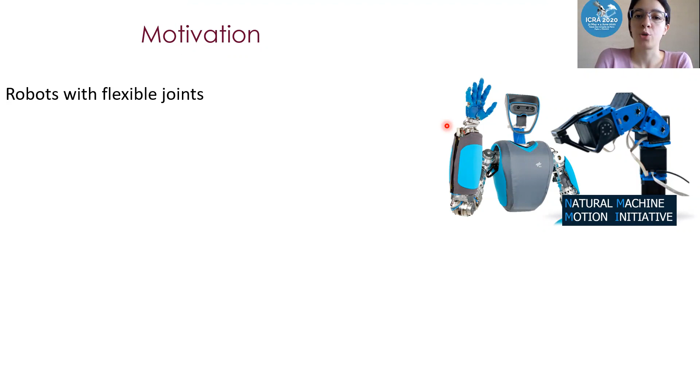So how can joints change their stiffness? Well, actually, they have variable stiffness actuators. And with the development of robots with flexible joints, also variable stiffness actuators have been developed. Nowadays, we have novel open source and cost-effective variable stiffness actuators that are emerging to the market.

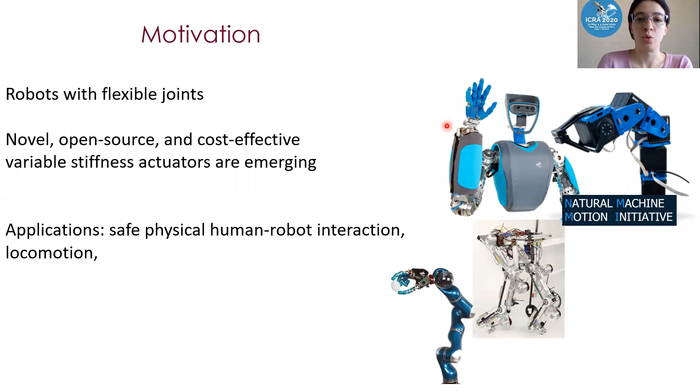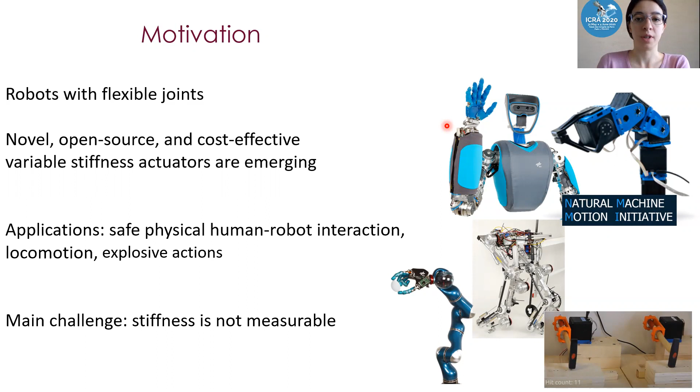The primary application of robots with flexible joints is definitely safe physical human-robot interaction. But those robots are also quite effective when it comes to locomotion tasks or explosive actions. I mentioned that stiffness is very important for these robots. So be prepared for the challenge. Stiffness is not measurable. This leads us to the question, what is the value of stiffness in robot joints?

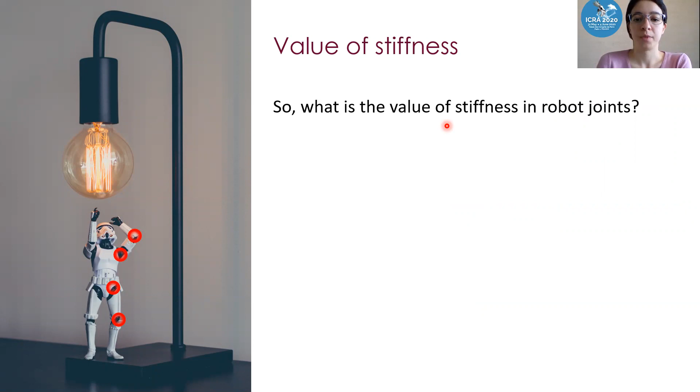Well, since stiffness is not measurable, we can express stiffness as a function of already available data of a robot. So we can either perform an offline identification procedure, but we all know it is time consuming. Another way is to use a model of stiffness, provided in a datasheet from the manufacturer of a variable stiffness actuator. However, temperature drift and the wear of springs might affect the accuracy of such data. So in this paper, we propose a smooth solution, the online estimation of stiffness.

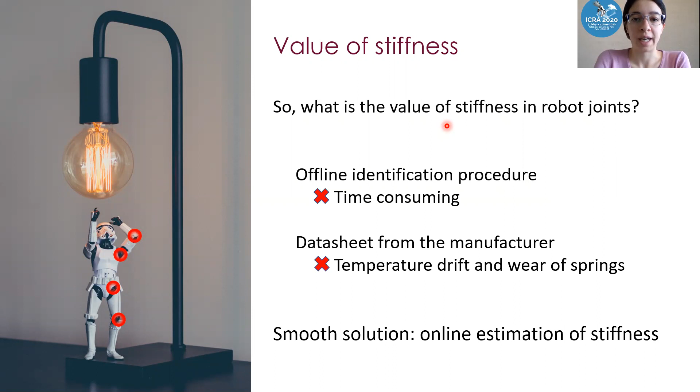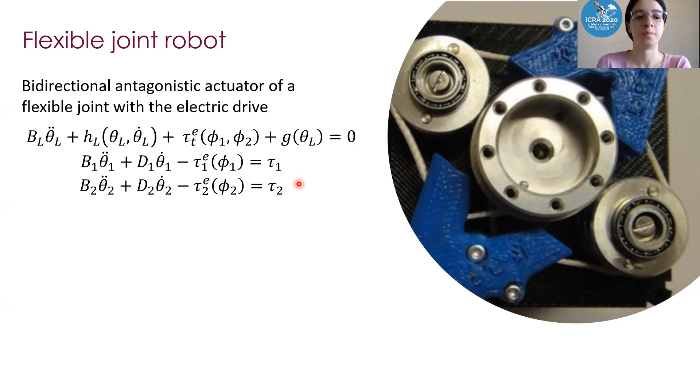The handy property is that the total elastic torque acting on the joint is actually equal to the sum of local elastic torques generated by each motor. By definition, stiffness in the joint is equal to the partial derivative of elastic torque with respect to transmission deflection. That is equal to the difference between the angle of a link and the angles of two motors. So finally, we can conclude that the stiffness in the joint is equal to the sum of two local stiffnesses.

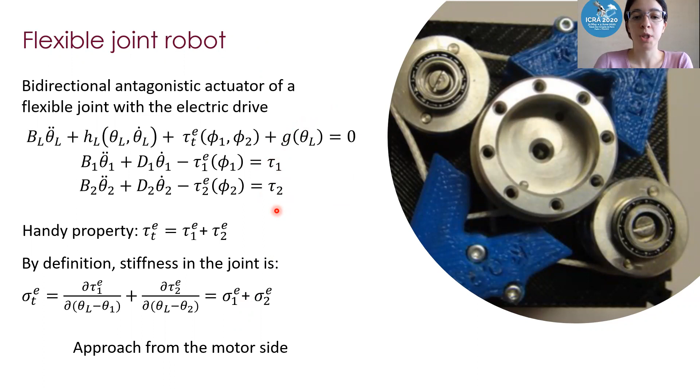This property allows us to approach this challenge from the motor side. This means that considering this set of equations, we can actually concentrate on a single motor dynamics. Another advantage of this approach is that it doesn't suffer from the lack of observability, which would be the case if you would approach the problem from the link side.

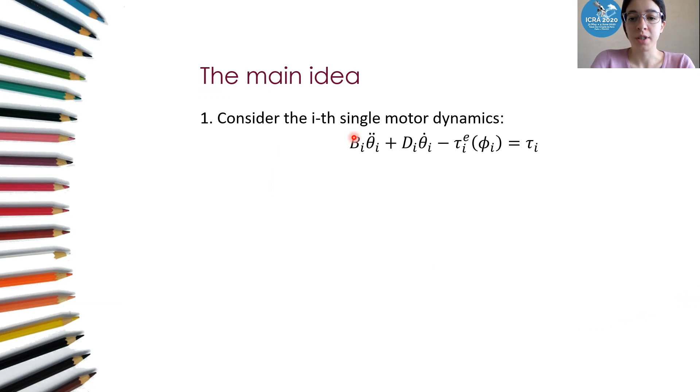Now let me tell you the main idea in steps. First step, consider the ith single motor dynamics. Then design a delayed unknown input observer to reconstruct flexibility torque. In order to design the unknown input observer, we need to rewrite motor dynamics in the state space form. And the main idea is actually that flexibility torque is taken as an unknown input to the system.

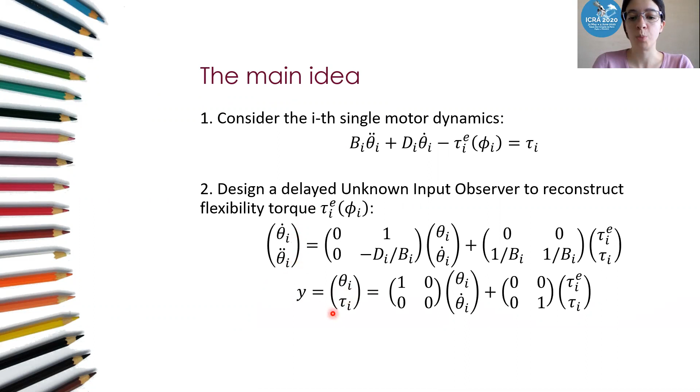So we use the unknown input observer to reconstruct this unknown input. I would also like to draw your attention to the fact that the outputs are positions of motors and commanded torques of the motors. And finally, we use the Recursive Least Squares algorithm to estimate stiffness.

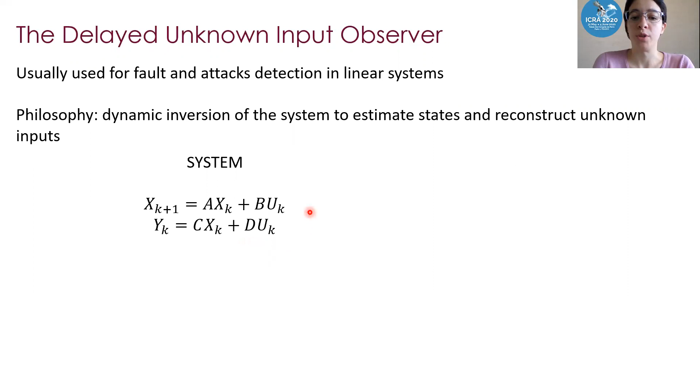The machinery behind our paper is contained in those 5 words, the delayed unknown input observer. These observers are usually used for fault and attacks detection in linear systems. The philosophy is that you should do dynamic inversion of the system in order to simultaneously estimate states and reconstruct unknown inputs. So if you have a linear system in the state space form like here, that is the system of our DC motor, then dynamics of observer is provided in these equations.

And you can see that for the estimation of unknown inputs, we need estimation of system states here. So for the states estimation, it is necessary to design those matrices E and F. The design procedure is described in our paper, and also it is provided in the work of Professor Sundaram. Another term is this one that denotes L last outputs of the system.

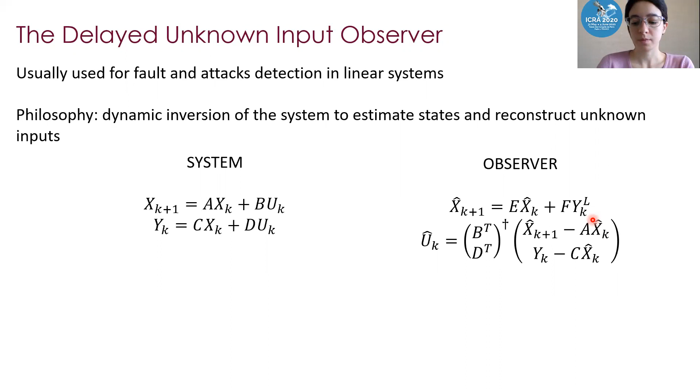So what is the role of these delayed outputs? Actually, these delays allow us to relax the conditions for designing the observer. So in our case, we do not need velocity sensor. The main advantage of using unknown input observer is that we can have a complete lack of a priori knowledge about the unknown input, in our case, flexibility torque. However, the disadvantage is that we need precise knowledge of dynamic system matrices A, B, C, and D.

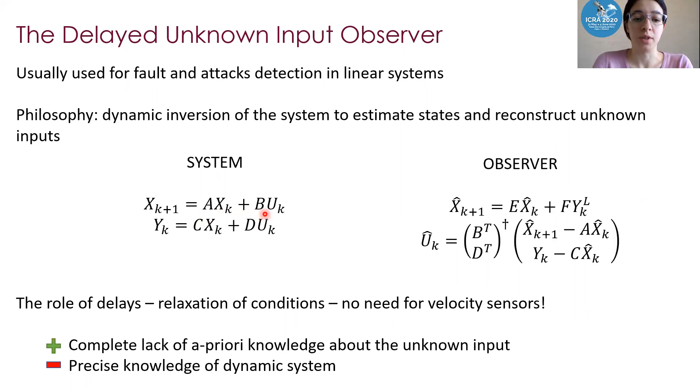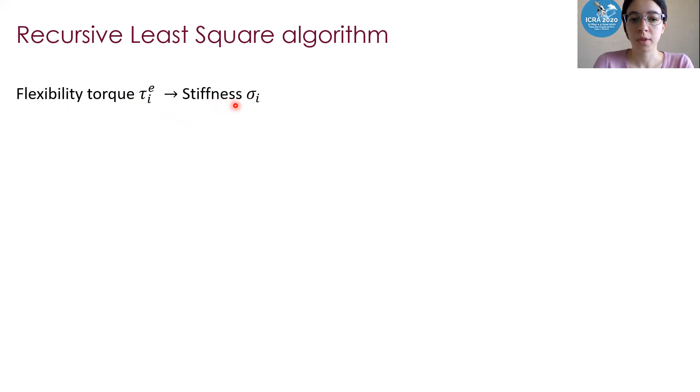Once we estimate flexibility torque via unknown input observer, we should now find what is the value of a local stiffness. It is well known that the approximation of a flexibility torque can be expressed as a function of powers of transmission deflections. And by leaning on the definition of stiffness, we reach this expression for the local stiffness value.

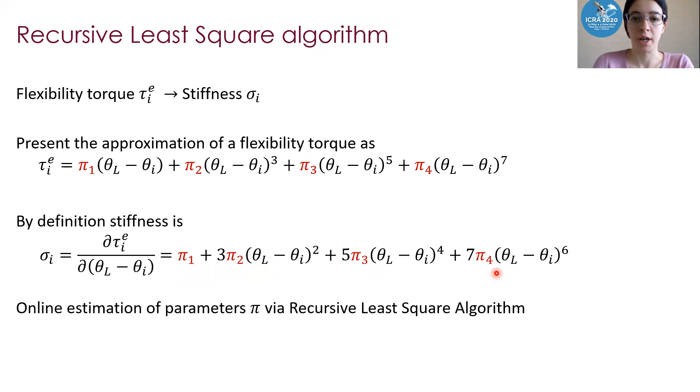Now it is clear that we need to estimate the value of parameters π1, π2, π3, and π4. And we perform online estimation of those parameters by using recursive least square algorithm. So to conclude, the data from sensors that we need are positions of motors and links and commanded torques to the motors.

Now the interesting part, experiments. We performed experiment first on 1 degree of freedom robotic setup that is actuated by qbmove variable stiffness actuator. Experiment is designed in a way that it has 3 phases. In the first phase, both position and stiffness are changing. In the second phase, position is changing and the stiffness is constant. And in the third phase, position is constant while the stiffness changes.

So what are the results? You can see in this figure that during the first and the third phase, the estimation of both flexibility torque and the stiffness is pretty good. Well, maybe except for this initial part, which is due to the fact that we initialize parameters of recursive least square algorithm with zeros. So in the beginning, we actually have complete lack of knowledge about initial value of those parameters. And that's why the algorithm needs some time so that the parameters can converge to values that provide a good approximation of torque and stiffness.

However, in the second phase, we notice that even though flexibility torque is well estimated, there is some drift in the estimation of stiffness. So why does it occur? It occurs because there is a lack of excitation for the recursive least square algorithm. So since stiffness is constant and only position is changing, there is not enough excitation. The mean square error for the flexibility torque estimation in this experiment is 10 to minus 5, and for stiffness it's 10 to minus 1. So how can we prevent this drift in the estimation?

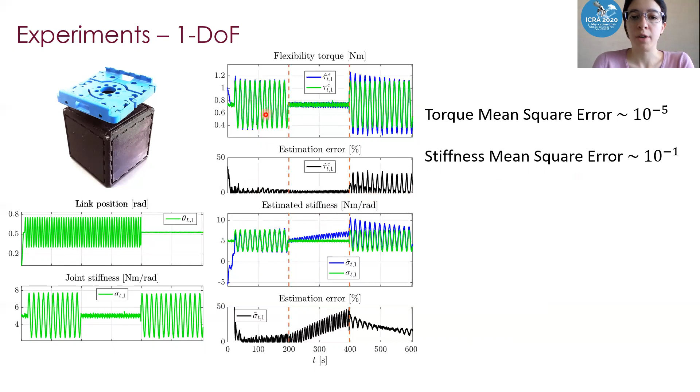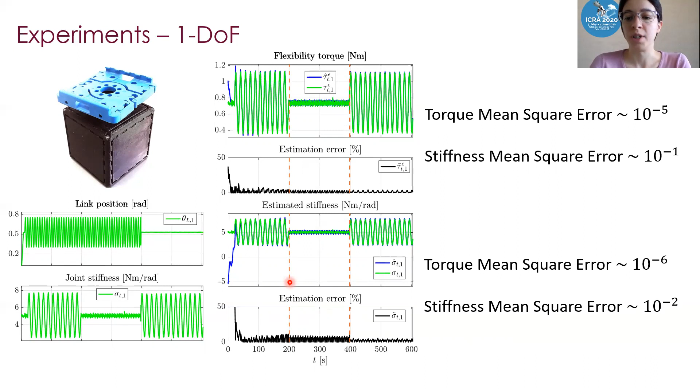Well, we can assume that parameters during the first phase, when the excitation is good enough, already converge to the values that provide a good approximation of torque and stiffness. So simply, we can stop the update at this moment. And this is the result. So now it's a fantastic estimation of flexibility torque and stiffness, and it is also proven by mean square error, which is 10 times smaller.

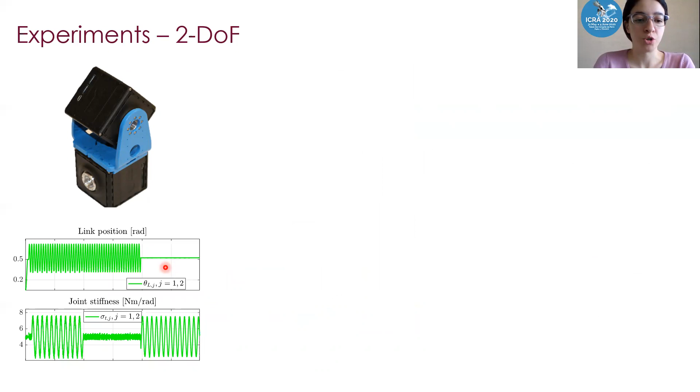Then we also performed experiments on 2 degree of freedom setup. The commanded position and stiffness for both joints is the same, and these are the results. So both flexibility torque and stiffnesses are estimated well, and by performing these experiments, we proved that our approach is applicable also for multiple degree of freedom robots.